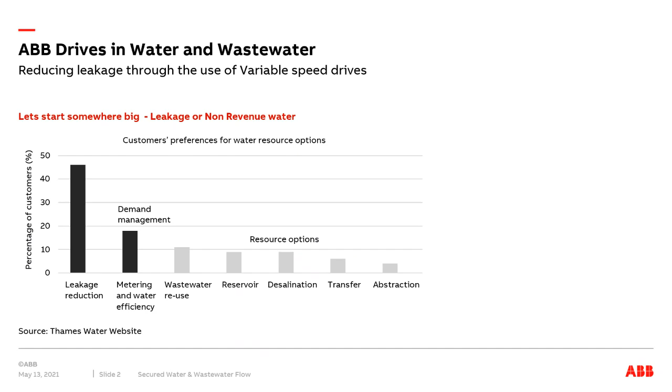So it's clearly a big issue, and hence we want to try and help, and we have got some instances where we have helped, so I'm going to talk through some of those today, and look at some of the issues and solutions and things we can put into practice to help reduce the risk.

So categorising leaks into a couple of different areas. There's background leaks, which is what I'd call an aggregation of smaller leaks, very difficult to detect in isolation, but can add up to quite high volumes because they are there all the time and in lots of places. We know there's a lot of new technology and innovation going into this area to detect leaks, and some of these small ones can be very, very difficult to find.

The more impactful ones, more obvious to customers walking down the street, as well as shown by existing operational data systems that water companies monitor, are bursts. That's where we see a significant loss very much against the normal flow profile for that network, and obviously, as we can see in that picture, normally they're very visual and exciting. So there's two levels - reducing leakage and reducing bursts - and both will help prevent the loss of non-revenue water.

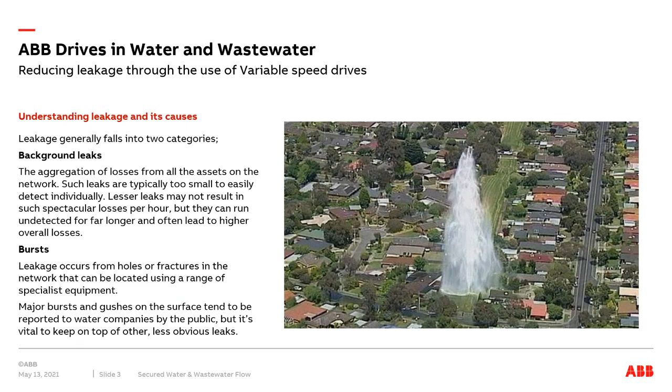When we talk about bursts especially, we are really looking at the impact of pressure transients. Bursts will happen - where they happen depends on a lot of things: the type of pipe work, the ground in which that pipe work is in, the historical pressure that network has been under, perhaps the users and the load on that network.

But fundamentally, the more pressure transients and the higher pressure stress that network is under, the higher risk of a burst. Those pressure transients can be caused by a number of things - generally valves being opened or shut rapidly, or pumps starting and stopping are significant factors. Of course, water companies and operators have control over some of these things, but a big industrial plant opening and closing a valve is beyond the water company's control, which introduces another issue.

Obviously, that kinetic energy flying through the hydraulic network as a result of valves opening and closing, certainly non-return valves which are spring operated, that stress and that pressure wave adds to the stress of weak joints or cracks and can only make the leakage worse, which may result in a burst ultimately. So we're talking about pressure transients, which occur over a very, very short time.

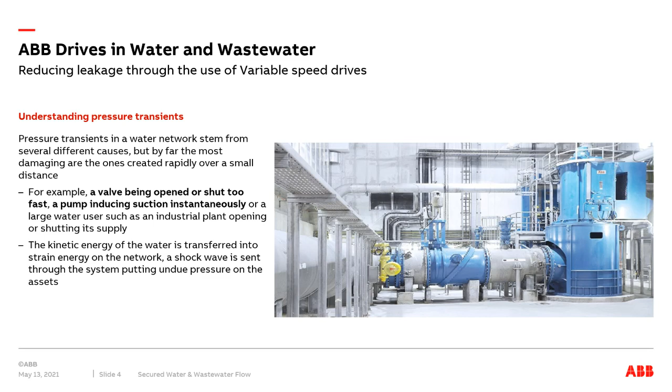So what we're going to do is go on a little journey, starting at the start point, if you like. And I guess up until the last 5 or 6 years, certainly from my experience, there's been very little understanding or real research into transients and why they occur and what damage they're doing.

This is a picture of a logger here, a Triton logger. There's lots of technology development in this area. But what this allows us to do is offer high speed and low speed data gathering at the same point in time. Many SCADA systems pull pressure data maybe every 1 second if you're lucky, and getting transient data was just not possible because of the technology and the loggers used. So what we can do here is read 100 or maybe 1,000 readings per second, which gives us a better indication and understanding of what pressure is actually on the network at a particular point in time.

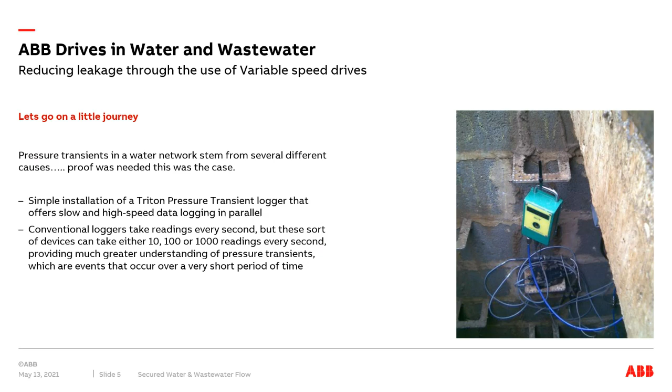Now, if we log too infrequently, we're not going to see these events in the first place. So the first thing is making sure that we genuinely have a feel for what is happening on that network.

Here's just a graph showing an example. The green line is where we would read every 1 minute, and you can see that line is linear because it's been interpolated between 2 measurement points. The red line is if we measure 100 times a second, and clearly with the green line you don't see what's going on in real terms. You don't see the impact of, for example, a pump start and what it's doing to this pressure. That graph is over about a 1 minute period, so you can see there are several oscillations happening with pressure.

So that's the first thing, is we've now measured what is actually on the network, and most of the control engineers amongst us will know that in order to control something we need to measure it. So that's great, we know what the real problem is now.

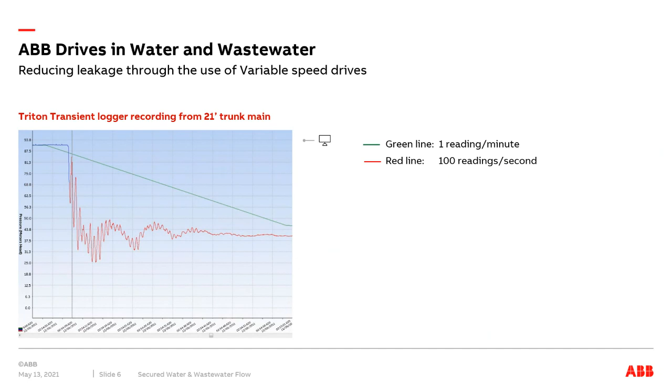When the pressure measurement was done, we identified a reasonable number of transient events, and clearly there was enough history of bursts on this network to look to develop and put in place an improvement project.

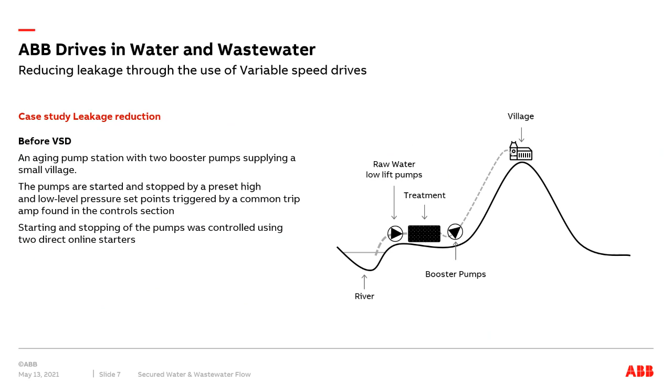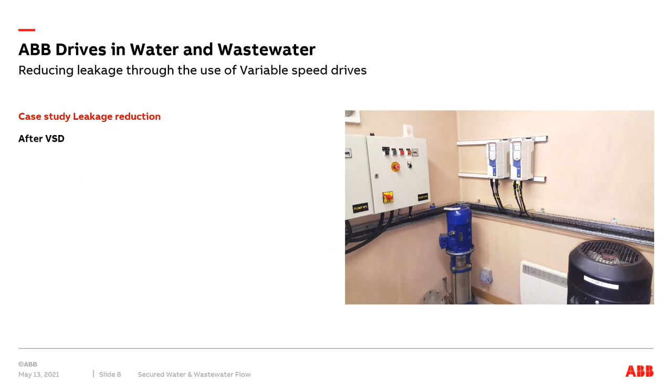So the solution here was, as you can see on the picture, a couple of VSDs in place of the direct online starters. And this project was purely put in place to reduce the transients. By reducing the transients, the knock-on effect would be that the risk of a burst is also reduced. So there's various things we have to do with the variable speed drives to make sure that we reduce the risk of that transient as much as possible.

One of the things is commissioning the ramp times. There's many theories at the moment about how those ramp times should be controlled - what sort of time delays we need for those pressures to settle down upon a start, and this sort of thing. But generally, the important thing is the variable speed drives allow us a soft ramping up and a soft ramping down of the pump. We'll talk about the non-return valves and the impact of that in a second.

But what they also allow us to do is control that pump system on a pressure. So we put a PID loop on to maintain a fixed pressure on that network, rather than having the start and stop limits as per the original system. So we can still start and stop based on pressure.

So we still introduce what we call a sleep mode, which is, for example, overnight when the demand is very low on that system, if the pump is at minimum speed and the pressure is already being maintained, then the system will put itself to sleep, stop the pumps, and then if the pressure begins to drop, we'll start the pumps up again.

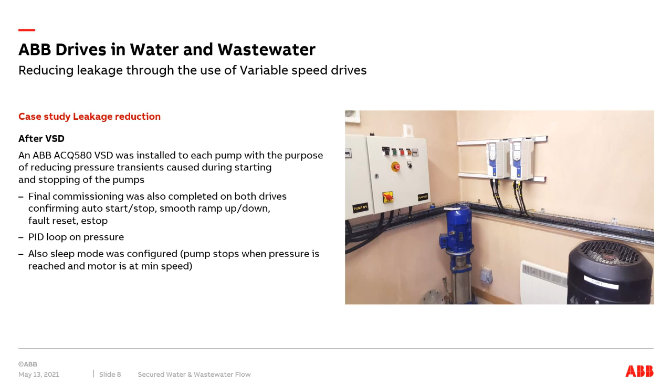So if we look at some results from the loggers from this site, a very simple picture of the impact the variable speed drives have had. Note the scale is slightly different on these two graphs. On the left-hand side is around a 10-minute period of logging, and you can see positive and negative transients around the duty pressure, which is around 80 meters. Each of those transients is because the direct online system is either starting or stopping a pump - you can see 1, 2, 3, 4, 5, 6, 7, or 8 transients over a 10-minute period. On the right hand side, with the variable speed drives in, we've got a very consistent pressure measurement, no transients, and a much improved system.

Now, the other thing to note at this point in time is the DOL - those transients are typically caused by the non-return valves operating. The DOL builds pressure up very quickly, so the NRV operates very quickly, and the NRV operating quickly is more likely to cause a transient on that network. By using variable speed drives, and commissioning them correctly, we can control the ramps very slowly when we know the NRV is going to close. By doing that, there's much clearer reduction in the transient by helping control the way the NRV operates.

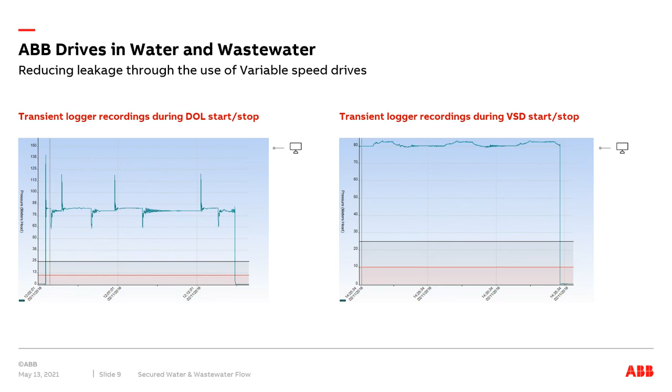So what experience has shown us is the number of starts and stops has a very direct correlation on the likelihood of a burst on that network. If you can reduce the number of starts and stops by half, then you reduce the stress on those joints and things by half, and you're effectively reducing your burst risk. So reducing the number of starts and stops is a good idea.

And for the fans of the 80s, I've put a picture of Knight Rider on because it was one of my favourite programmes. Just thinking about the wheel spinning concept - starting things aggressively is never going to be good for mechanical devices on the network.

Here's some examples of 2 or 3 sites where we installed this sort of control. On site number 1, going from over 6,000 starts and stops per month of those pumps - and think about those transients that happen every time you start and stop a pump - down to 437 when the variable speed drives were in place. So not only have we reduced the number of starts and stops massively, by over 90% in that case, but we're doing it softly anyway because there's a variable speed drive there. So there's really a double whammy in terms of improving the situation.

Some of the other sites you can see the reduction's not quite so severe. Many factors come into that. Some of it comes down to the design of the pump in the first place with relation to that network - for example, it's more difficult, or we have to go to sleep more often, if the pump is too big for the network, so it hits minimum speed more quickly and then we have to go to sleep. So there are some design and dimensioning aspects we can learn from this as well, in terms of trying to reduce the number of starts and stops, which should also help reduce the risk of transients.

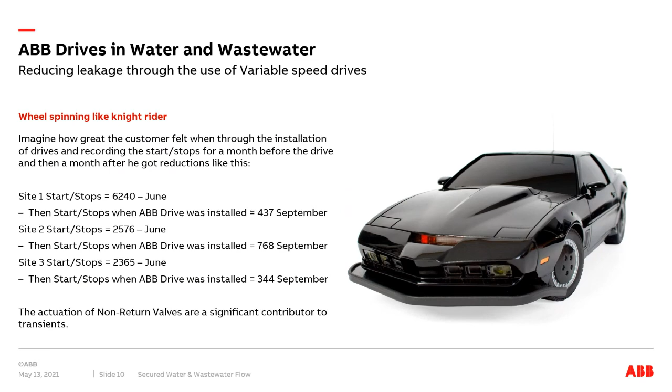So just a summary of that particular project: relatively small investment, including all the loggers, the site interventions and installation, so over £600,000. But the payback of that was very short, around about 9 months, and also an additional energy saving on top. So really been a successful project overall.

This is happening elsewhere. Several water companies in the UK with similar sort of programs. We kicked this off several years ago, but by the end of this year, the savings as a result of that investment are looking to total over £4 million. So really, quite simple in terms of there's not lots of hydraulic work to do in terms of interventions. And the key thing there, the pipe bursts have reduced by 90% on those sites where we've put variable speed control in and commissioned them and optimized them.

So really good result. Again, some things we just can't stop. If there's 100-year-old pipe work somewhere, then there's going to be a point where it fails no matter what you do. So that's the kind of burst thing.

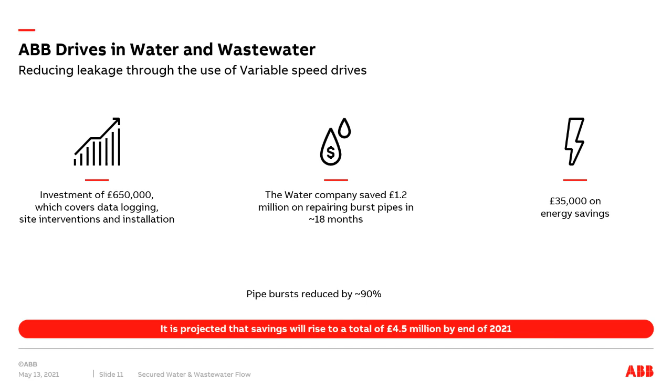The other aspect of things is just keeping the pressure under control and the leakage that happens because of these small leaks. So just as a bit of an example, a couple of booster sets. Here's the pressure curve for, let's say, the traditional control. Put some VSDs in, and we can control that, at least that top end of the pressure, a little bit easier. And again, we'll still have some start and stop scenarios in there in terms of the control philosophy.

But the key thing I wanted to discuss at this point in time was then when we have the VSDs installed, we have much more control over the delivery pressure of that network. I talked briefly about it before in terms of the overnight situation. Overnight, we have the opportunity, because of the demand, to potentially reduce the pressure set point on that system, which is what this graph's kind of showing, where we've done that.

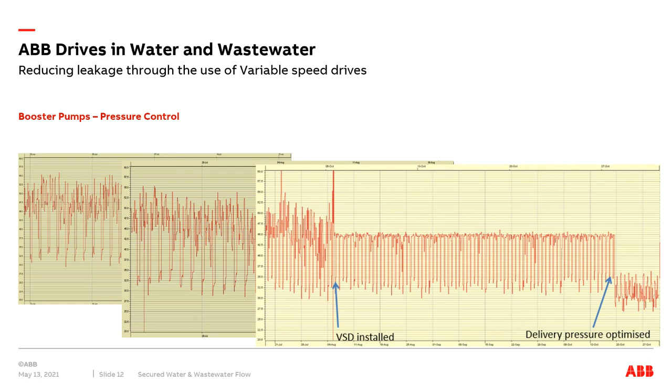So yeah, get control - some hints here. Get control of your pressure. On-off control is not good. We've seen that because of the impact on NRVs and other mechanical stresses. PID loops are great, easy to put into VSDs. You don't need an external controller.

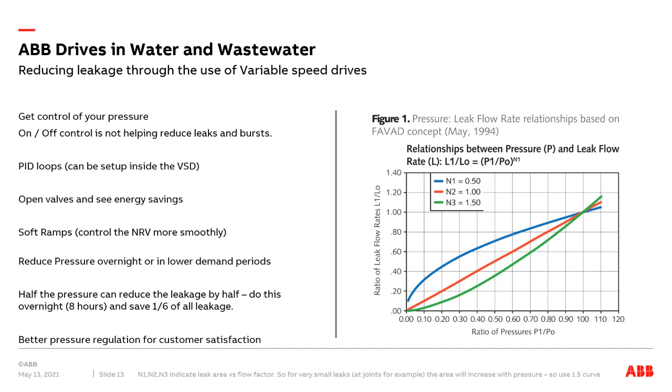So just in summary: water loss can be due to water hammer, which is all down to this - very much contributed by the starting and stopping of pumps, especially DOL, and the impact that the NRVs have on that system. We know a lot of systems are aging, so there are things we can do with the VSDs to help manage that situation. Certainly the soft starting and stopping with the ramping process is a great advantage. Putting these systems into proper PID control and controlling pressure is also one, because you'll get additional energy savings. Don't forget we can control level, flow or pressure with the drives, depending on the system you've got.

And yeah, mentioned auto changing there again. Do we need to start thinking about different methods of auto changing? Now we've got more modern technology, the risk of overpressure situations is massively reduced because we have a PID loop in play.

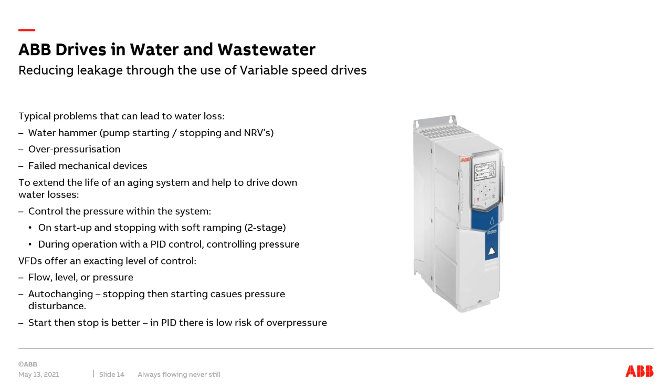Okay, we've got a couple of questions in so far, Martin. Let me just have a look at them. Right, the first one is from David: couldn't the same reduction in transients be achieved by using soft starters to ramp the pumps up and down rather than VSDs?

You may see similar results. I would say there's a couple of counters to that. One is soft start, one is VSDs, where we've seen the most success. We've actually put in maybe 2 or 3 different ramps depending on the speed it's doing. I have to be honest and say I'm not sure if soft starts would allow that dynamic ramping, so that would be my first point - we've seen success automatically changing the ramp depending on speed. The second point would be the burst reduction - soft starts may help, but getting it into PID control, into speed control, is also an advantage.